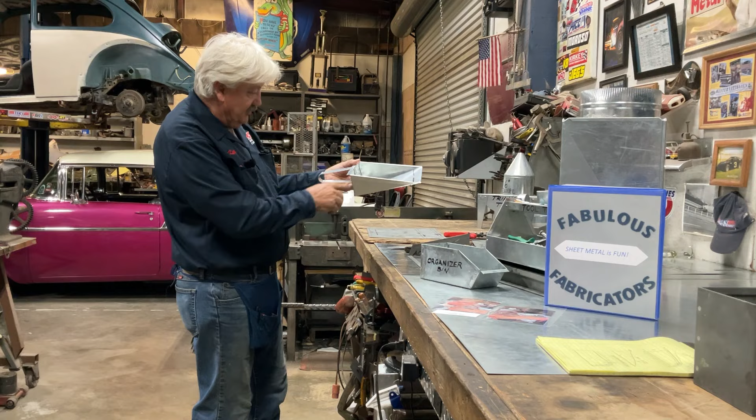Tonight's project is going to be the dustpan. We're going to make a dustpan that is 11 inches by 9 inches by 3 inches deep. We're going to bend the handle up and we're going to rivet the handle to the dustpan. 26 gauge galvanized.

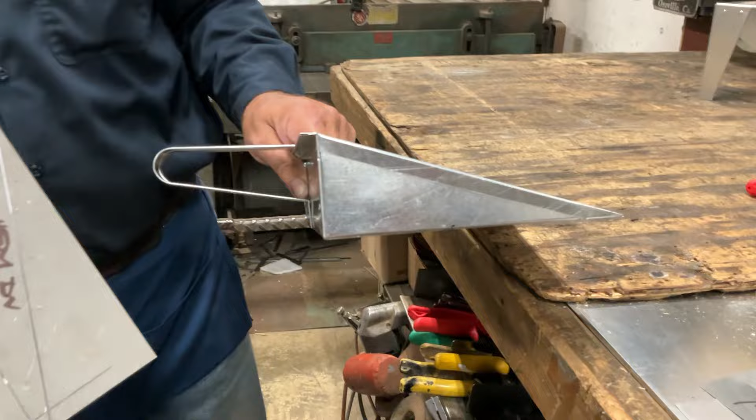So you can see our dustpan is right here. Here's the base, here are the sides, here's the back. We have a 1/2 inch hem and a 1/2 inch 90. That's what we have in the back of our dustpan. All right, so now we've seen what it looks like. And this is the piece of flat stock.

Now, I'm making a dustpan that is 11 inches wide, 9 inches this way, and 3 inches deep. So if you wanted to make a dustpan just like this, which I like it when you guys make them different, you can make it bigger, smaller, shorter, longer, whatever fits your needs. If you want to make one just like this, you're going to start with a piece that's 18 inches by 13.5 inches. And that's going to give you an 11 by 9 dustpan.

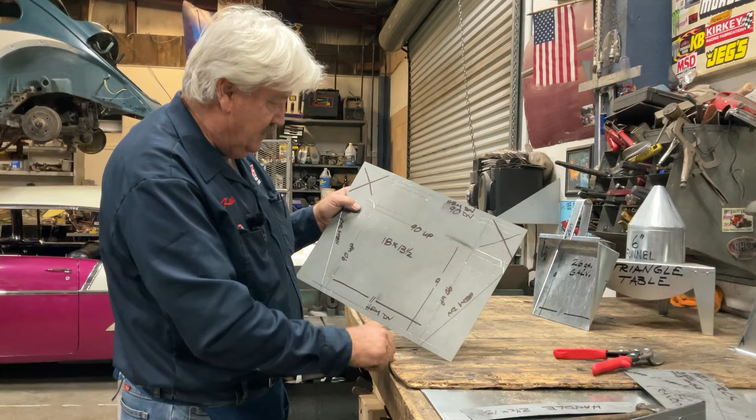So we've cut our piece 18 by 13.5. I've laid out the pattern. And let's go ahead and cut it out. And I'm putting on my reading glasses. And let's cut this out.

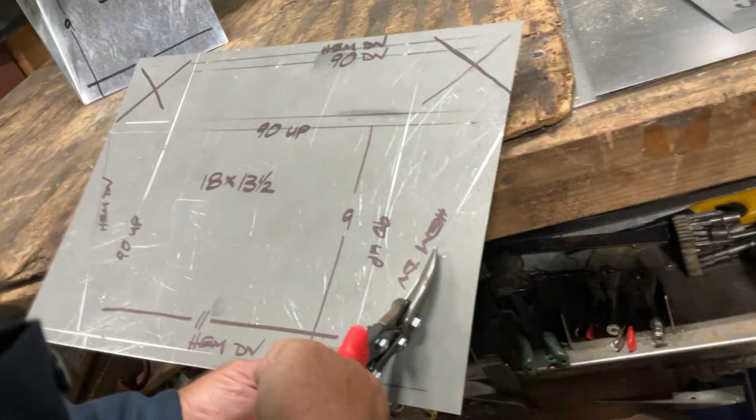Whenever you cut with your snips, you never go to the end. So as I'm squeezing, I'm cutting. And before I get to the end, I stop. And as I'm opening the snips in preparation for the next cut, I'm pushing forward. And that's what keeps you in the line. That's what keeps you cutting straight.

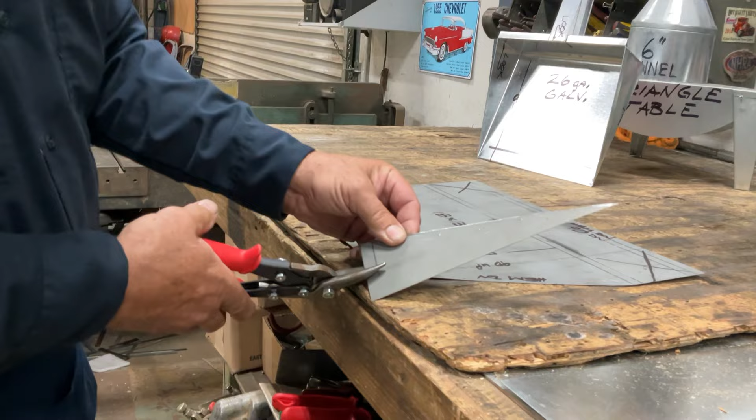If we went to the end, that even bothers me to do that. I hope you can see what it looks like if you do it the wrong way. Don't do that.

I'll come to your house and eat all your chocolate. Plus, my wife says I snore.

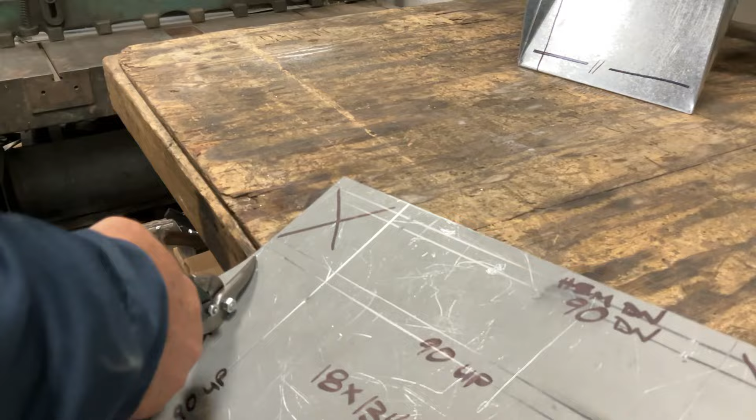All right. We got one side cut out. Let's cut the other one. I like these offset snips, but it's personal preference. Any snip will do. Before I throw these in the trash, I usually try to fold that pointy end around. Now we're going to cut this corner out.

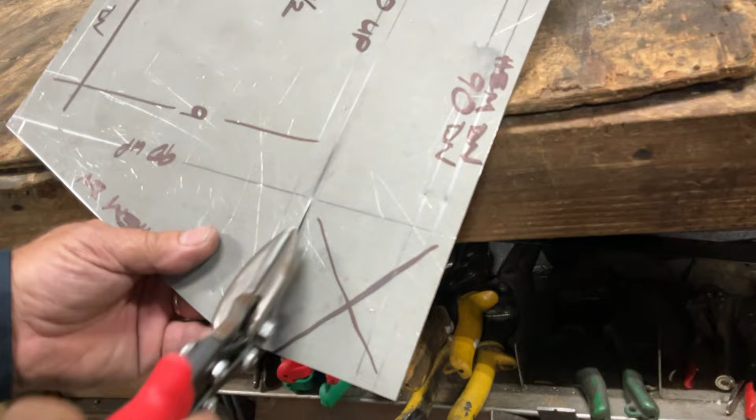Now you see I stopped a little short of the line. This line is going to go all the way. Now, since I stopped short, this part is still attached. So when I cut that little piece off, it stayed attached to there.

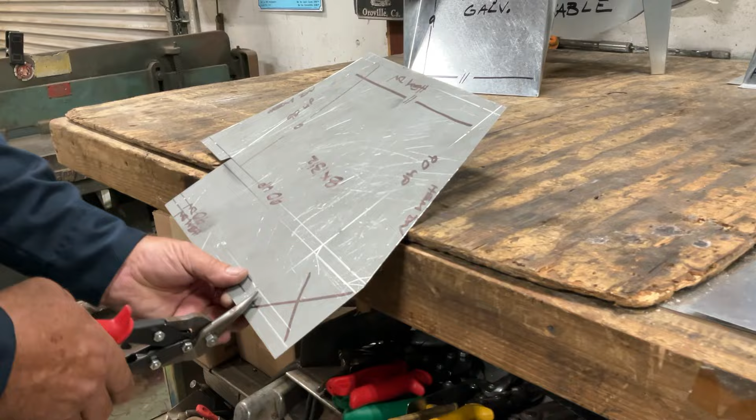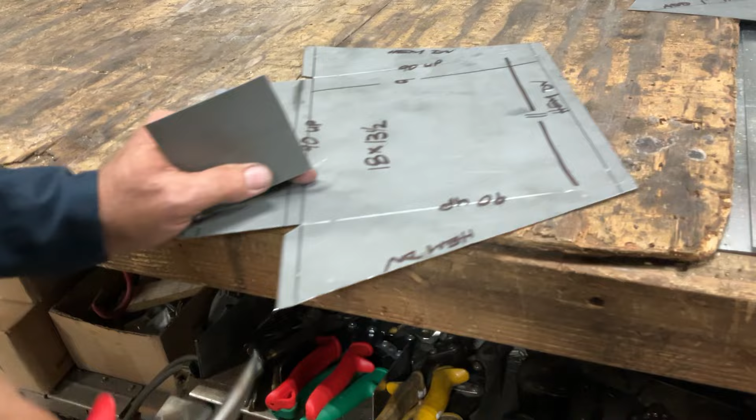So here we go again. This side, you go all the way into the corner. This side, this is our half-inch tab, this is what we're going to put our rivets in. I'm going to stop short and fold that up out of the way. Then that piece stays attached. Not only is it not trying to get us, we don't have to look for it on the floor.

Now we're going to notch these corners out for the hem. Anytime you're notching, always cover the part that's going to fall with the end of your snips.

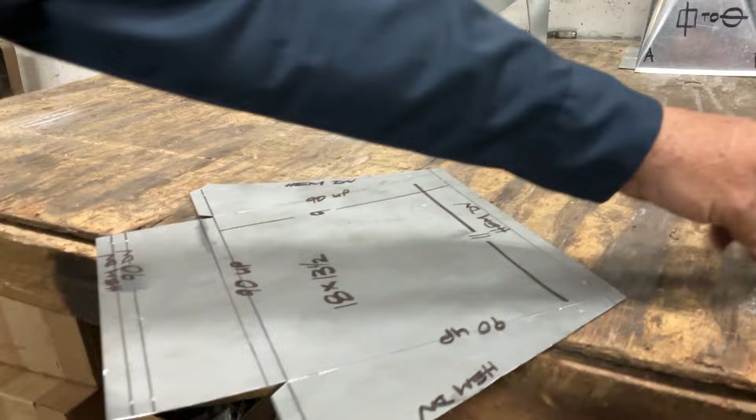That was the right way. Let's do it wrong, just in case there's some visual learners out there that want to see what wrong is like. Okay, so now this time the drop, I can see it in its entirety. See all the drop? Whenever I make this cut, if I can see it, it can come toward my face. So what I'm going to do is just put my thumb over it. If I don't put my thumb over it, sometimes it can launch. That's not good.

We're going to cut these out. All right, let's get that off.

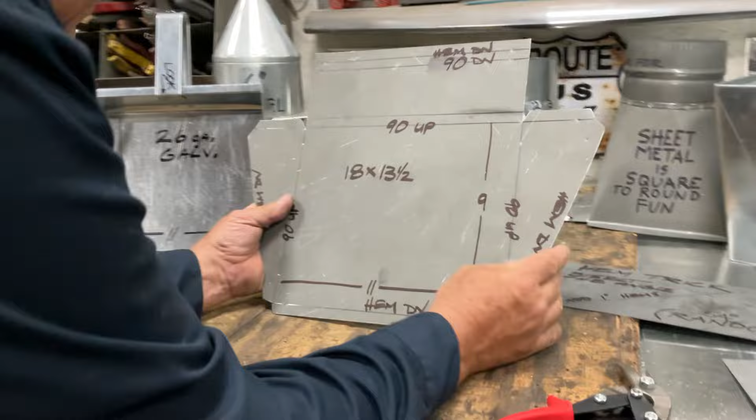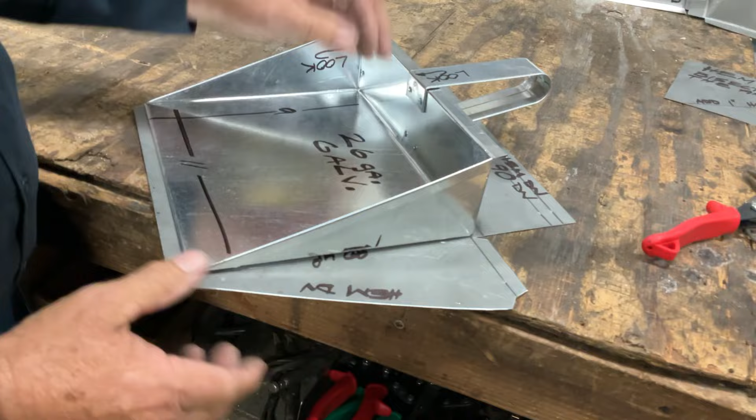So what we have here is our dustpan would fit right here. This is the side that we're going to fold up. This is the back we're going to fold up. The other side, these are the hems.

And while I'm laying out a pattern, that's when you want to put all your markings on there. So if you get this laid out and then you get a phone call, or it's coffee break, or it's Friday afternoon and you come back on Monday, we don't have to reacquaint ourselves with the project. While it was most clearly in our mind as we were laying it out and making it, we went ahead and marked it. So I could come back a month from now, not even reacquaint myself with the project, and just go right back to it and bend it up.

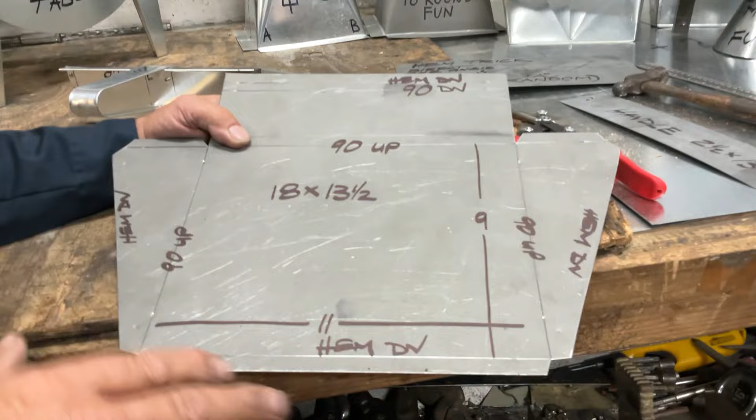So that's a hem down. Anytime we're going to do our bends, we always make the initial bends the ones that affect the project in the least amount, and that would be a hem. You ready to go over the brake and bend it up? All right, all right.

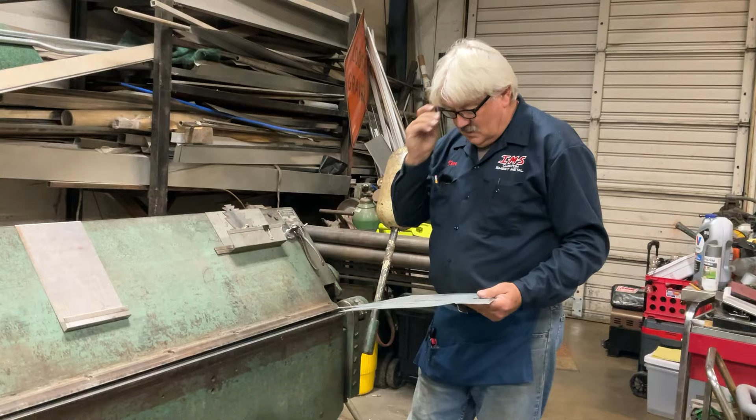Put my glasses back on for the bending. So the sequence of bending, you always perform the function that affects your project in the least amount of a way. So I have a hem down here, let's go ahead and do that.

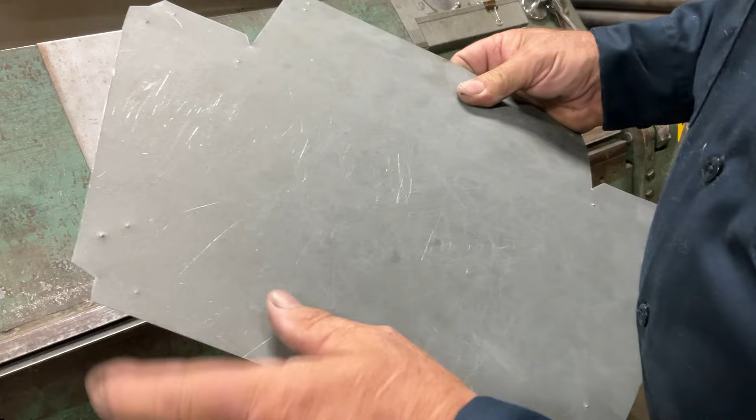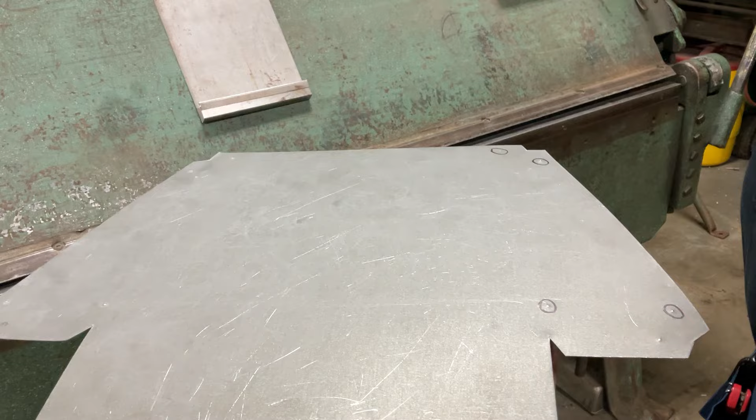So what I've done, I'm hoping you can see this. On these lines, there's a prick mark right there. That's what I'm looking at when I go to my other side. Right there on the line, I put a prick mark on it. And that way when I flip it over, you can see these lines. I'm going to circle a couple of them just so you can see them. Those are the lines that I made from this side, but because that's a down, I'm going to be reading it from this side. So I will be looking at the prick marks and not the scribe lines.

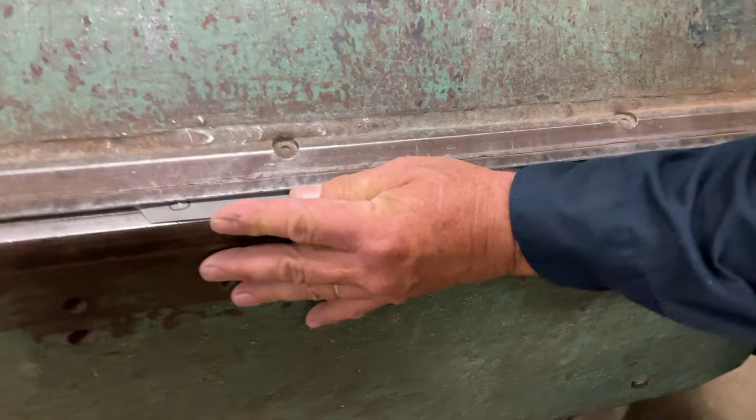All right, so I'm going to line those prick marks up, clamping it down. That's the initial bend. The front of the brake here is 135 degrees, so I bent that over to 135. Now, 180.

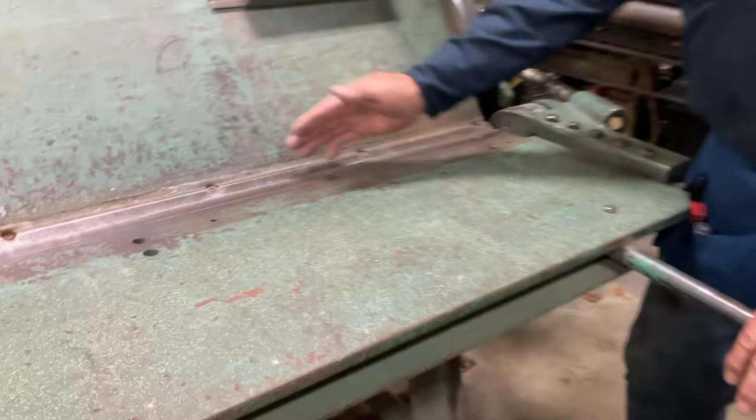Let's do the same thing again, lining up the prick marks. Using the prick marks because we did our drawing on the other side and transferred those lines through with a prick mark. There's 135. If this is flat like a table, that would be a 90-degree bend. That's a 90 and an additional 45, that's how we get the 135.

Now, a hem. 180. Look at that, so I've hemmed over these two edges. Now let's go to the front.

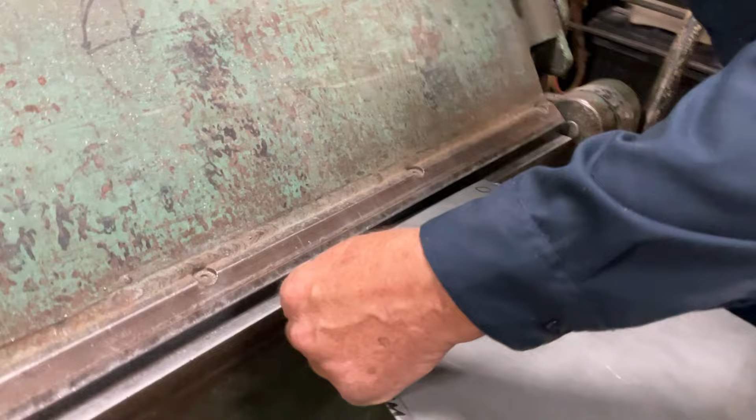And if you are not a highly skilled, highly paid professional of sheet metal talent, then you can go to, there's a couple of our videos. One is how to make a tool tray. And a couple videos ago, we did one where we actually showed you how to make some fabrication and bending tools. So go a couple of them back. What was that one called? Folding and forming, yeah. And then you'll be able to do everything that I'm doing, without this giant machine in your living room. This machine is 10 foot long. All right, so we've got those three.

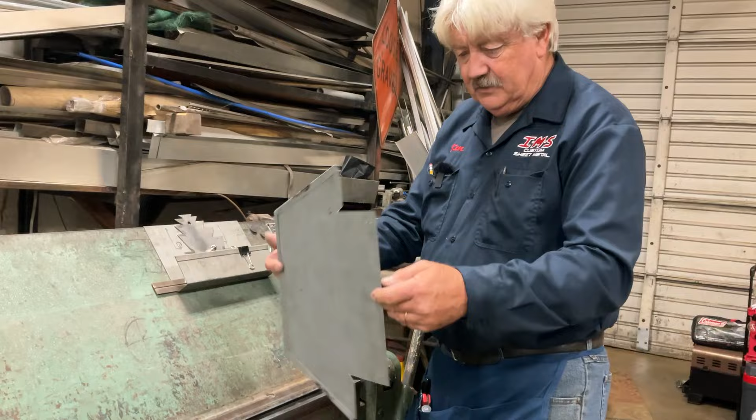Glasses back on, back to the hem. So now we're on the back side of the dustpan. There's 135.

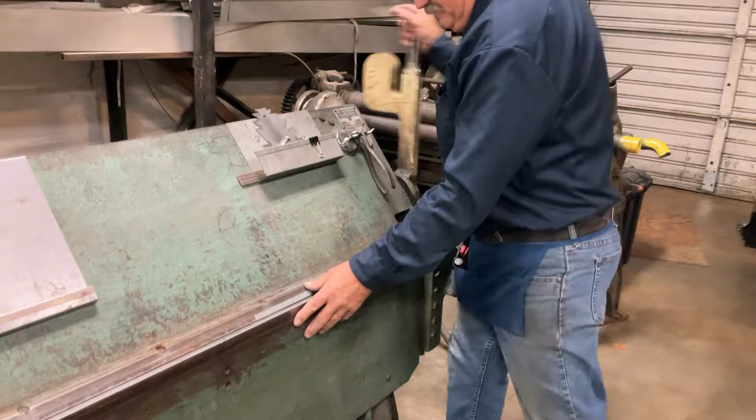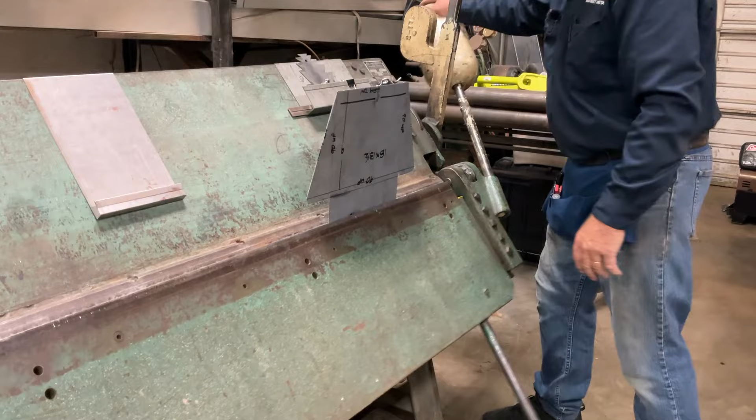Flattened out, 180. Now I'm going to clamp it right on that bend line. This one, we're going to go a 90. When the front of the brake, the bending leaf, is flat like a table, that means we've made a 90-degree bend.

Let's just take a quick look. I folded this hem, the one across the front, the one across the other side, and we've done the bends on the back. Now we're going to bend this one as a 90-degree up.

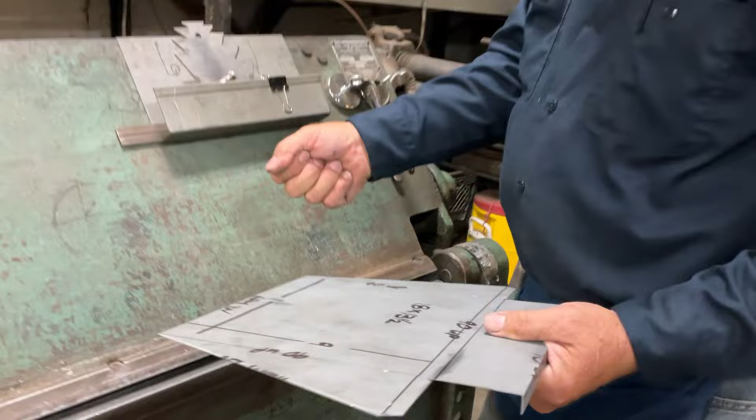So whenever we put this in the brake, we don't have to squeeze the handle all the way till it stops. I just want to make sure we have a grip on the piece, because with these hems on here, if we clamp this all the way down, it flattens out a portion of this, and then we can't impress our friends and neighbors. And that's why we get up every morning, because we have friends and neighbors.

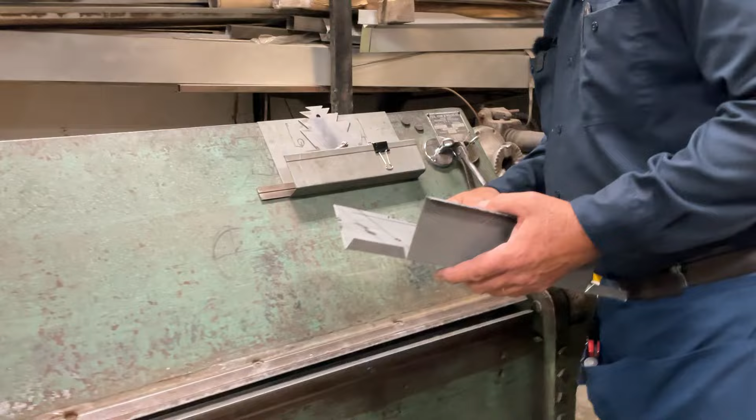All right, I'm going to show you that part so you can see what we've got so far. Okay, I'm just going to give this a little push right here and a little push, because I want this flange to come up on the back side of the back.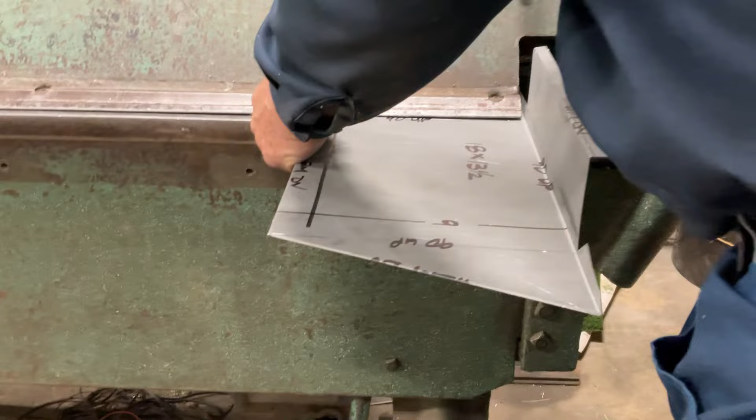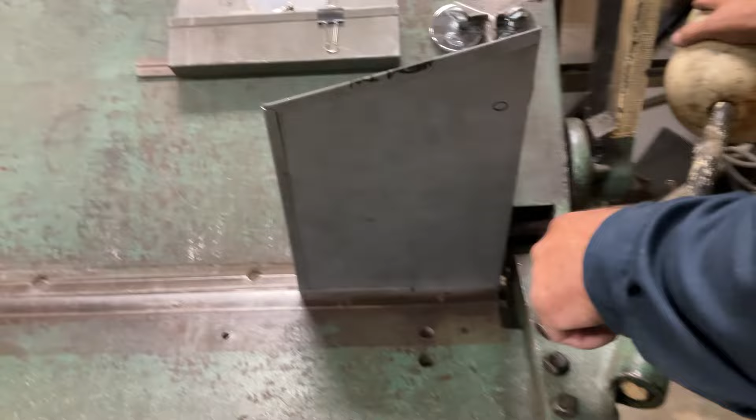Okay, you ready? Look at that. I'm just making sure that whenever that goes to the back side, and I'll explain that to you when we get back over to the bench.

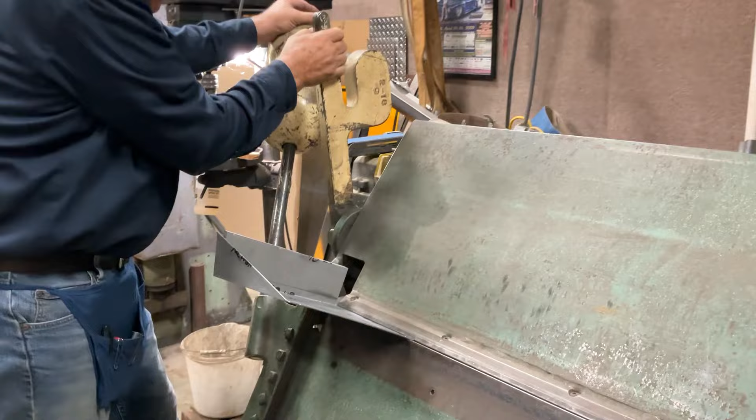Now, to make our last bend, we have to go to the other end of the brake. We're going to do the same thing over there. That was my end of the brake. This is Stacy's end of the brake. But she's operating the camera tonight, so I'm going to do her end.

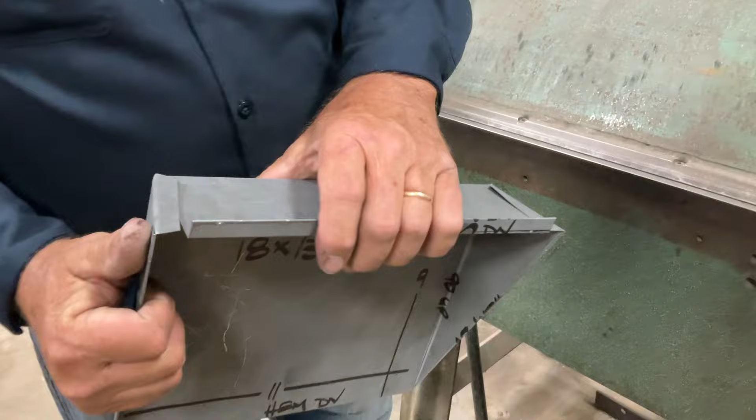We're going to bring that up right there till it stops. Might as well go ahead and close it. So what we've just done is we've just bent these sides up. All right, let's go back over to the bench and finish the...

Are you still rolling? Yeah. Okay. Well, this is, we're not going to feature a lot of the work we're doing on the Volkswagen, but we're going to make a Baja out of it.

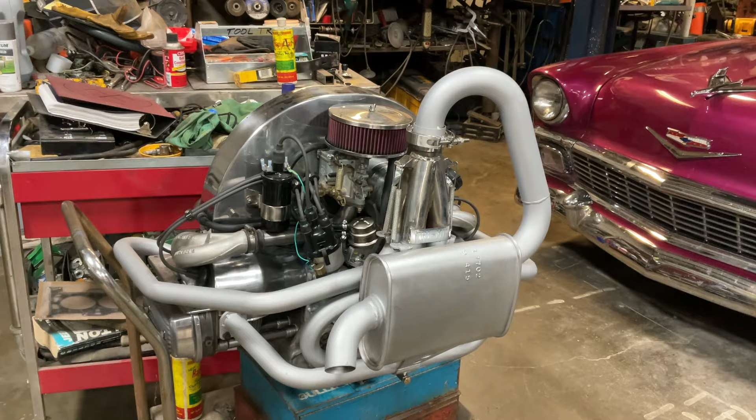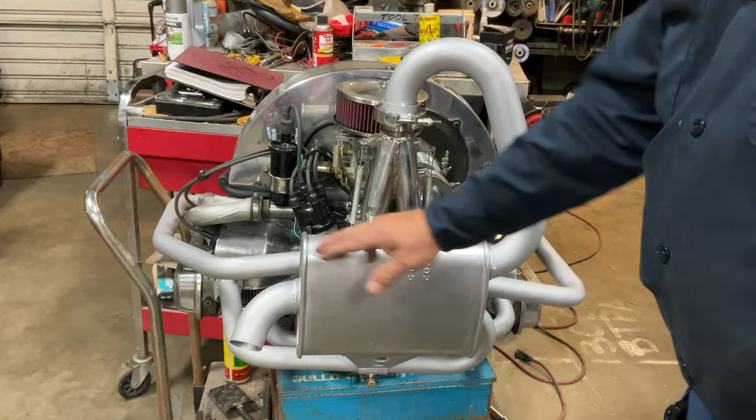So we've done a bunch of metal work, and I went through the engine, the crank and rods were good, but new bearings, cam, pistons, rings, all new all the way throughout, and it's ready to rock and roll. I bought a couple of J-bends on the internet and a flat muffler, and I was able to weld this into it, because this had a stinger on it. This engine is out of a dune buggy.

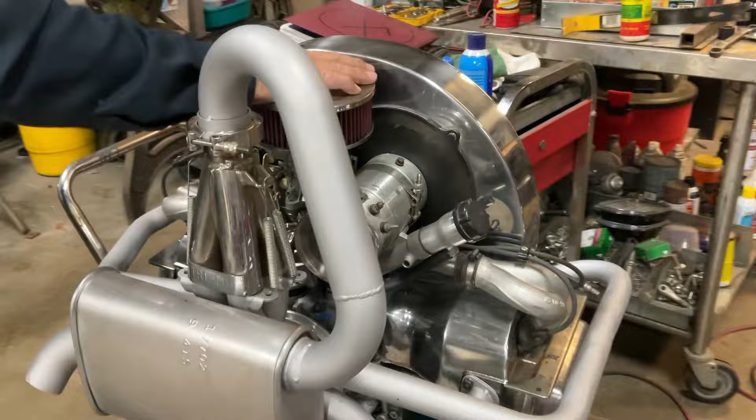So we won't go too deep into this, but those of you that know what an air-cooled Volkswagen is, that's what that is. All right, so what we have here is the handle, and the handle is 2.5 by 13. I'm going to bend an inch on either side, but since we're right here,

We are going to bend a hem. Then we're going to bend another hem. We're making the handle right now.

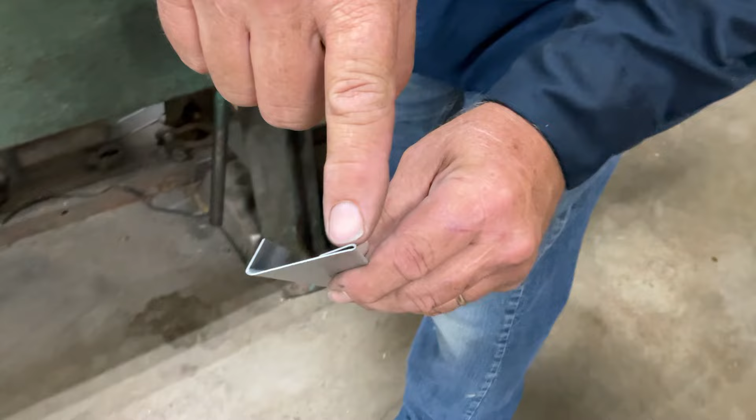So I've already finished one hem. If you can see it, it's shaped like a teardrop. That's what you want. You don't want to flatten it out all the way. You need that teardrop. That's what gives you the rigidity down the hem line. That teardrop right there, can you see that? If you flatten this totally flat all the way, then this loses its rigidity down through the handle.

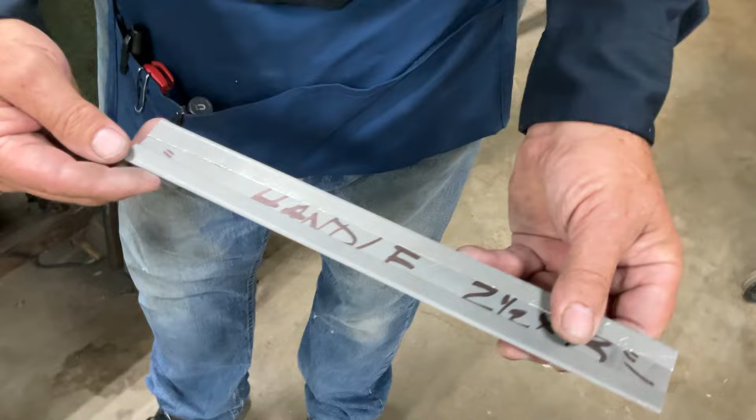All right, we're already here, and I know I'm going to bend a 1-inch flange. This was on Grab Bag of Tools, I think. That's our Christmas tree scribe. So I just made a mark at 1 inch right here. Let's bend that up an inch.

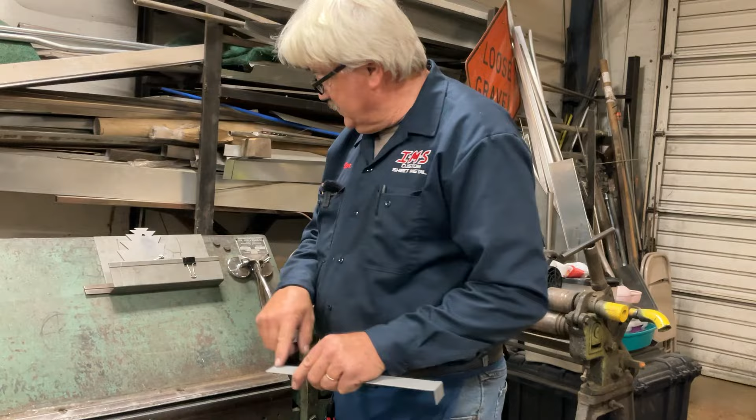And there's an inch on this side. So this is quarter, half, 3/4, and then 1 inch. There's a scribe at 1 inch. If you want to learn how to make this, it's on the grab bag of tools lesson. So we're going to bend this at 1 inch.

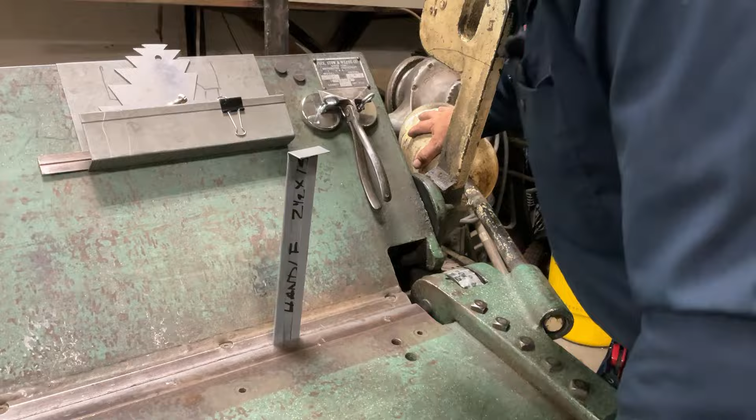Okay, all right, let's go back to the bench. When I nod my head, you hit it.

So we just folded the hem on our handle, hem on both sides, 1 inch on this end, 1 inch on that end. You can see what we have here. We have our hemmed handle. Here's the 1 inch, here's 1 inch.

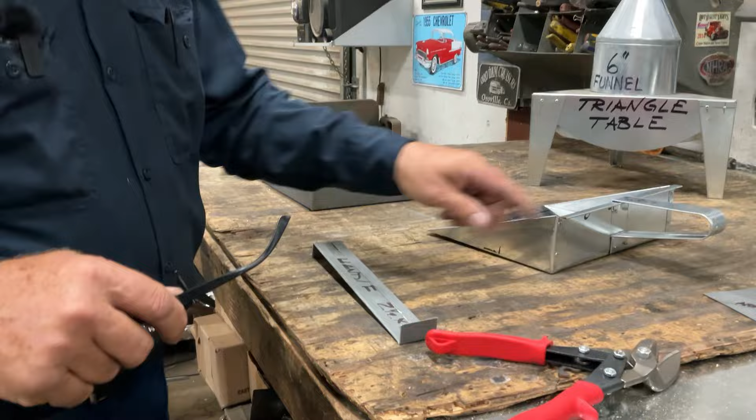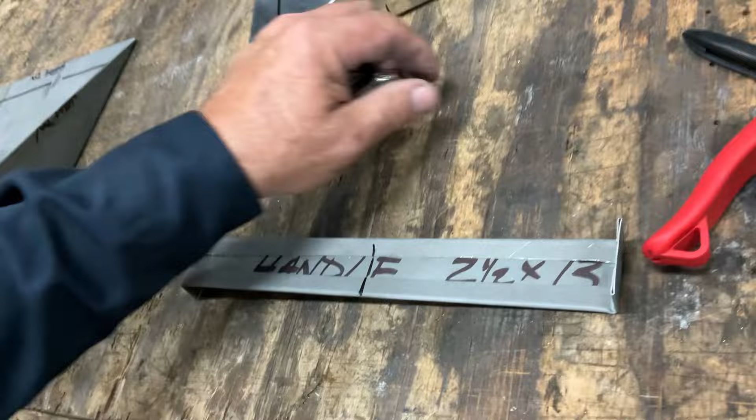Now what we're going to do is bend this. What we have here is all kind of high tech. I'm going to make a mark at 5.5 inches. That's halfway, 5.5 is half of 11. Now this is the high tech part. So at your house you might have a piece of pipe or a broom handle, but here we have this really nice tool, it's called a box and pan brake. It's probably $6,000 or $7,000. So what we're going to do is use this to bend our handle.

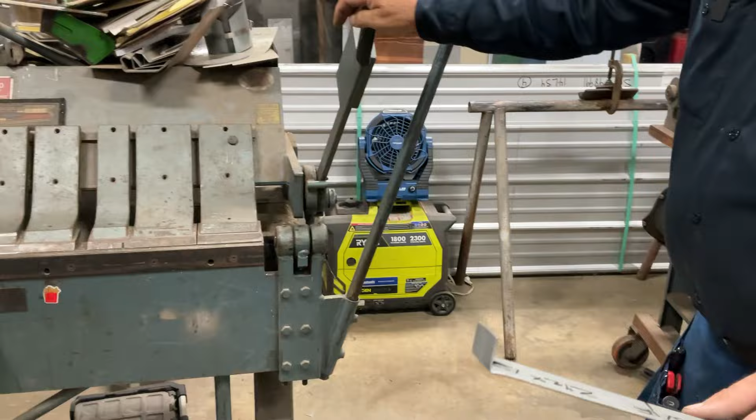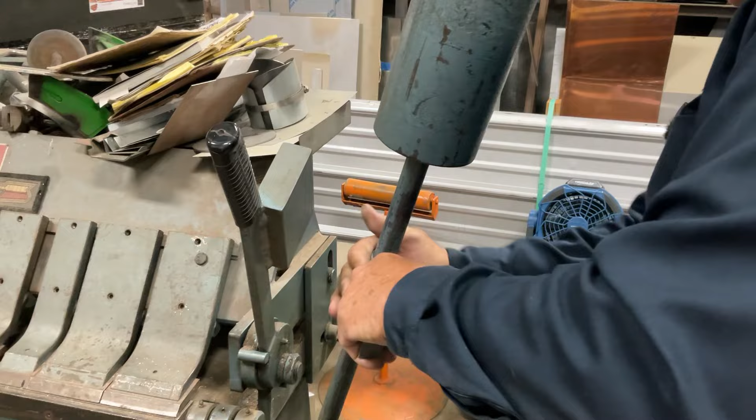Here's our mark right here. Here we go. Man, that's why that machine's worth so much. Look what awesome work it does. All right, so...

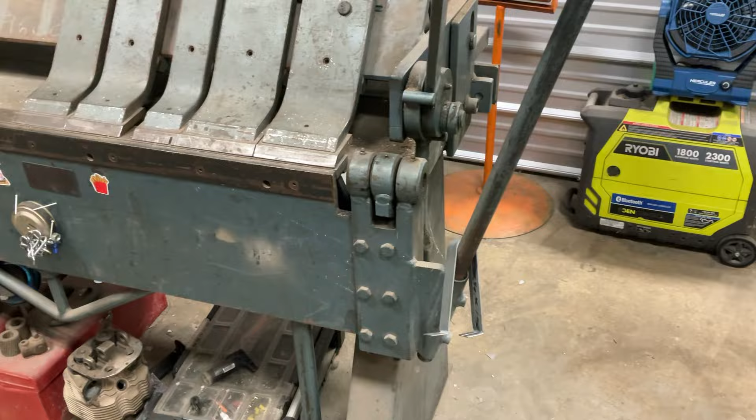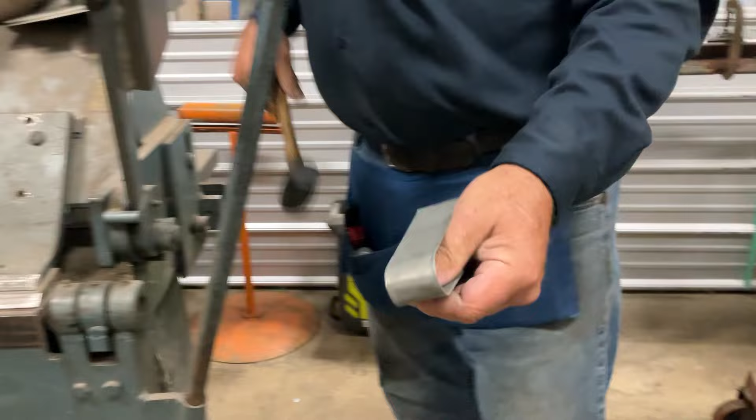You'll notice that the bend is irregular. But did you see there was no panic look on my face? The reason there's no panic, can you see this right here? I'm going to get this around here. Look at that. So if you had a $7,000 machine like I do, you can have results just like that. Wow, that thing's worth every penny. Wait, a little bit more right here.

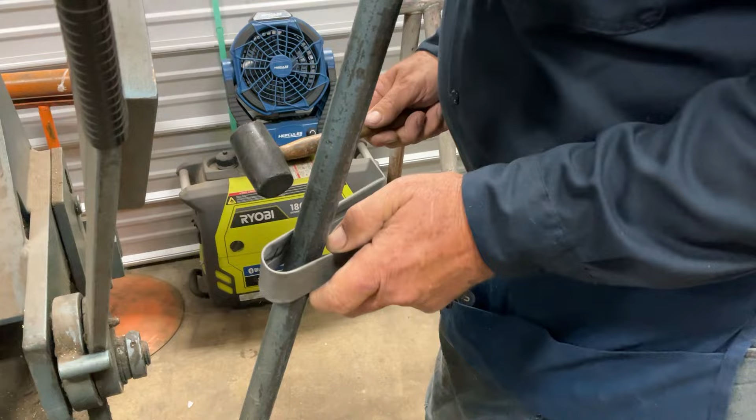Or you could use a broom handle. But just in case somebody comes in, we don't want them to catch us using a broom handle, because like I said earlier, I'm a highly skilled, highly paid professional.

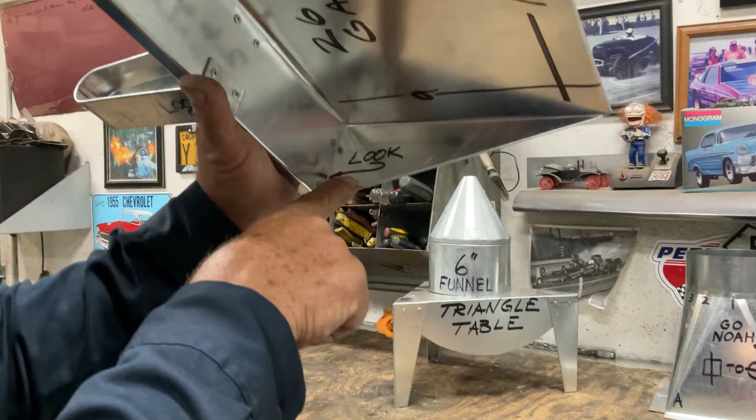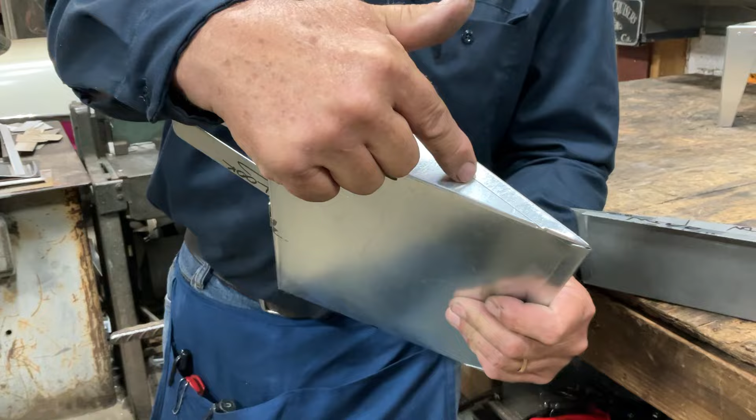All right, so we are ready to... this tab comes around the backside of the dustpan. On the dustpan that I made, see, look what it says. What I want to point out is the hem, the tab is on the end piece, and it comes around behind the back. So that means if you're holding here and pushing down here, the tab is locking this corner together.

If we would have put the tab on the back side, then when you pushed here, you'd be putting stress on the rivets. But that's the reason the tab is placed where it is, that's the reason it comes behind. Because this way we get the strength of the tab, and really the only thing the rivet is there for is to keep the dustpan from disassembling itself. So that's critical, that's the reason the tab comes around the back instead of being on the back and bent around. All right.

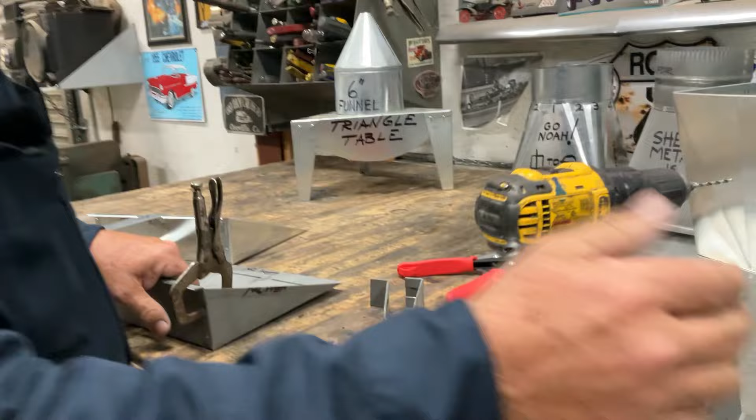Let's put 2 rivets in here. We're gonna... we always want to push as hard as we can reasonably push and use the fewest amount of RPMs that gets the job done.

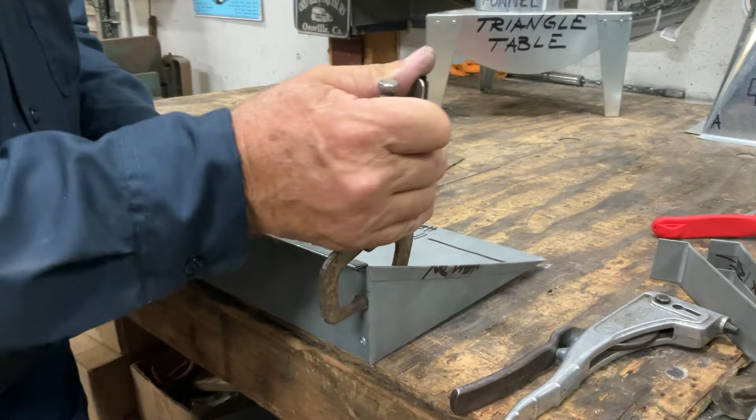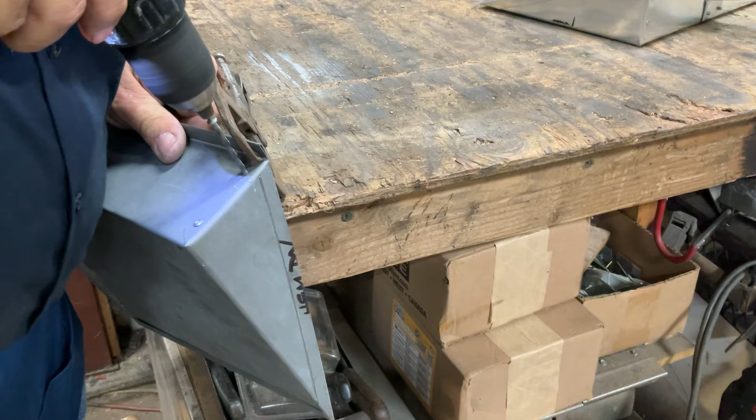Let's put a rivet in here. I'm going to get this up as far as I can. Put one more rivet in it. I keep this old junk piece of plywood on my bench so I'm not continuously drilling holes in my workbench. Always make sure you put your body in a safe place when drilling holes.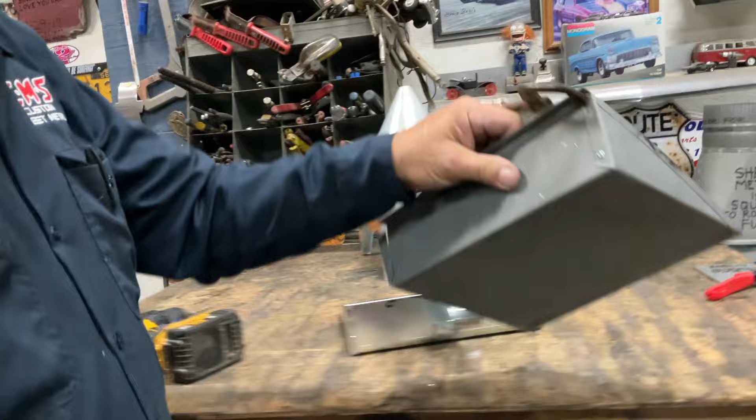Almost every tool we have in the shop wouldn't think twice about giving you a bruise or a cut. We don't want to do that.

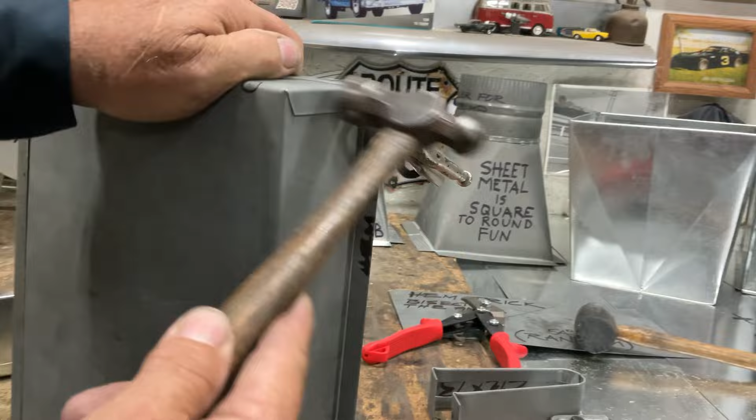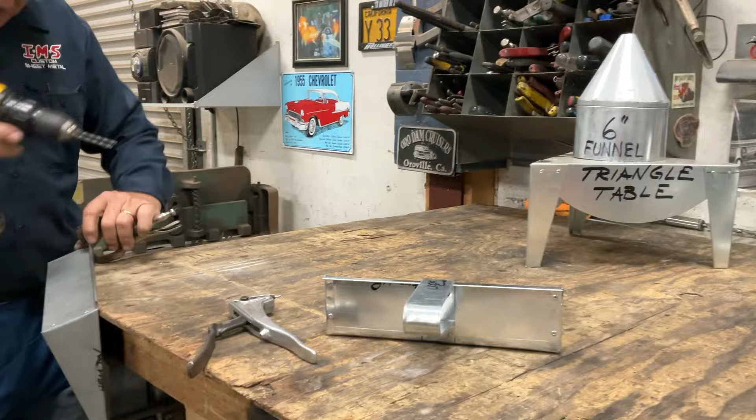I'm going to tap this around a little bit. Let's go back to the corner, because if I'm going to drill a hole in something, it's going to be a piece of plywood that I don't mind throwing away at the end of the day if I have to.

Preloaded the pop rivet gun, that's a good trick. I'm going to get this vice grip up as far and away as I can. Let's get our second rivet in here.

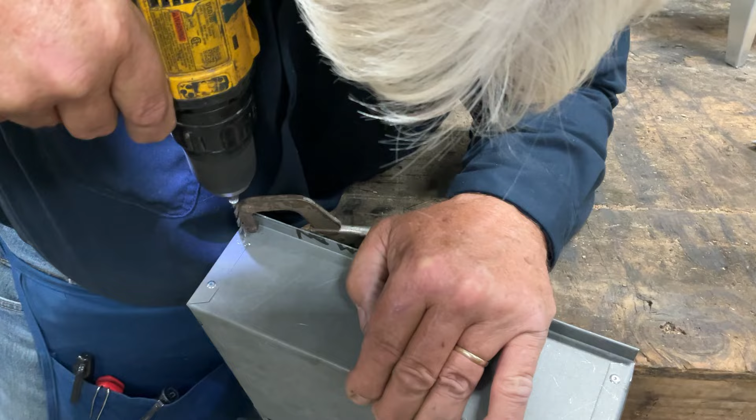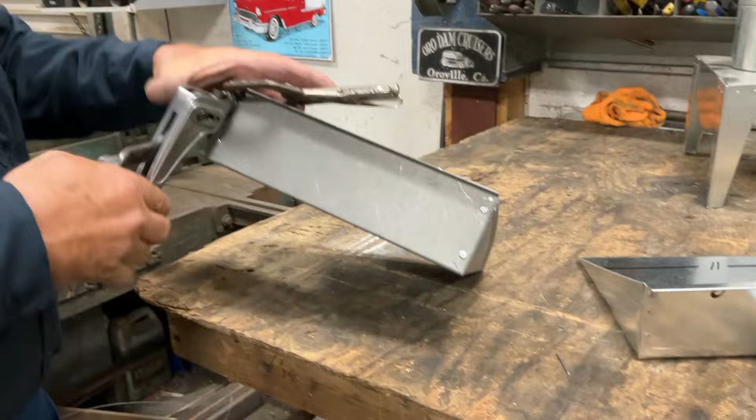Well, I like the way this is looking. I know we're going to need more rivets, so we're going to go ahead and load this. That way, whenever we get ready to put the handle on, the rivet's going to be ready.

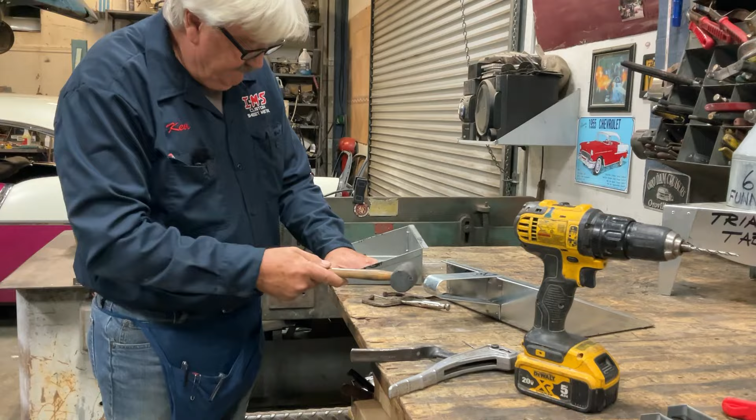I'm just tapping this side around. You can see the bow in it. The reason it's bowed is because I didn't clamp it super hard in the brake over there, because that was going to smash all of my hems. So I'm just going to tap this around.

I think I got this at the Dollar Tree 20 years ago. All right, now to the handle.

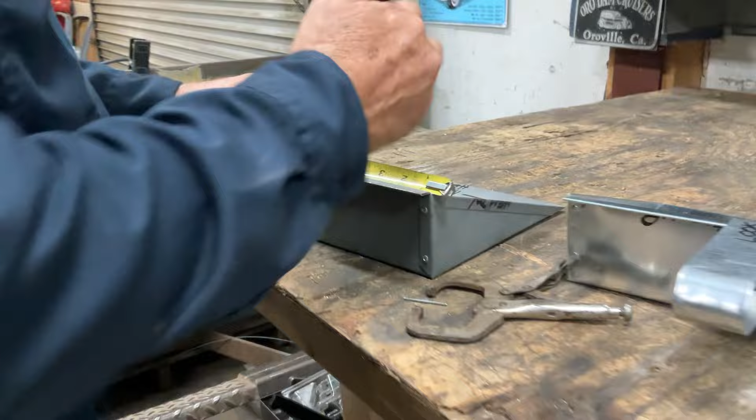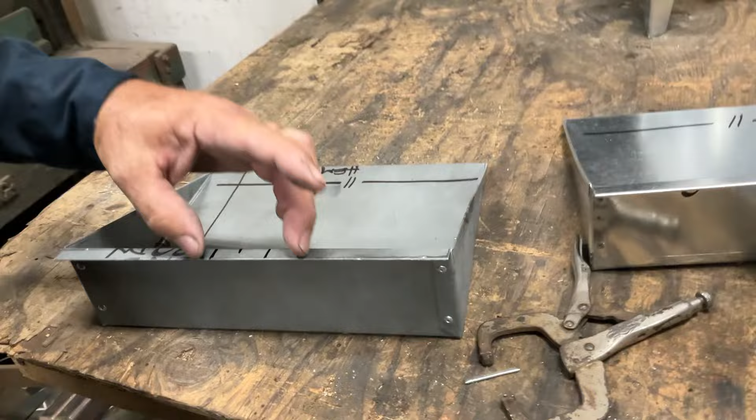Our dustpan is 11 inches wide, half of that is 5.5. So I'm just going to make a mark at 5.5, but our handle is 1.5 inches wide. So I like to mark the center line, and then go 3/4 on either side. I like to mark both sides, and then it makes it more difficult to do it wrong. If I only marked one side, there's a chance I could look at that and put it in the wrong place. That's the center line, there's a center line and 3/4.

And look, if I just move this over a little bit, I can double check myself, and now I know I'm in the middle of the dustpan. So what we're doing with our handle is I brought the top of the handle inside the dustpan, because let's look at that.

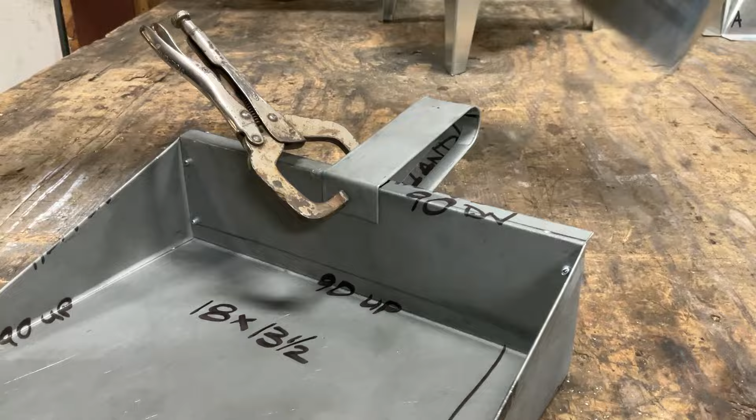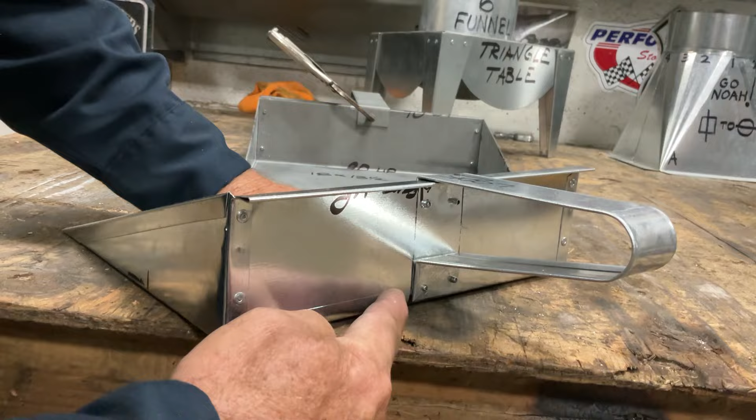If I have weight in the dustpan and I'm pushing down on the handle, I want the handle over here. Just like we did with the back, if my handle comes to the inside on the top, then I'm actually pulling against this flange, against this bend right here. I'm not just pulling against the rivets. Conversely, the bottom of the handle is outside the pan. That keeps the pan clean on the inside and the bottom. And also, when I push down on the handle, I'm pushing into the pan.

So this makes everything last longer. Right whenever I push down here, the load is being carried by the bend and not the rivets. If this was outside here and I put the rivets in, then all the load is being borne by the strength of the rivet. If I push the handle down, the only thing I'm trying to do is pull my rivets out. But if we push this over the top, you could almost use it without the rivets. And the fact that you can almost use it without the rivets tells you that you're putting it together correctly. So let's get back to this. Let's put a clamp on there.

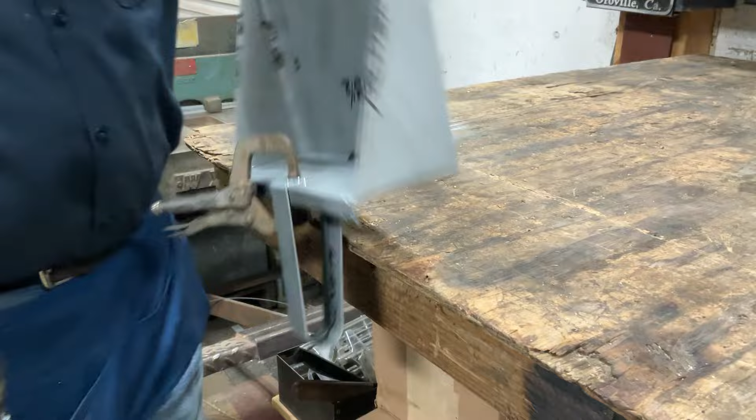Always put yourself in the safest place you possibly can. So you'll notice that I'm drilling a hole. This hem goes over and comes back for half inch. So I want to get this rivet somewhere in the middle of that hem. And this way I get all three pieces. So I got both parts, double thickness of the hem, and I got the back.

Oh, this is looking good. I can't wait to happen upon a mess, because we got the cure.

That's how my dad drilled. He always stuck his tongue out. So that's how I do it whenever I remember to do it that right. Stick my tongue out.

All right. Oh, we are getting so close on this. This is exciting.

All right, so on the back, we're doing so good. Let's go ahead and measure this. 11, half of that, 5 and a half, three-quarter off to each side. Now I know that's where the middle of my handle is going to be.

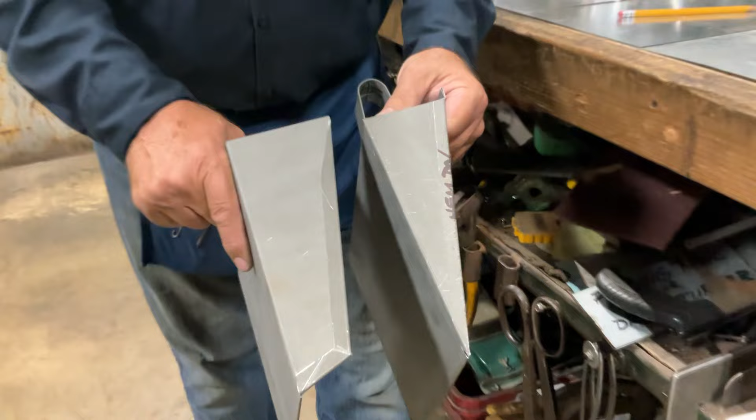This is, can you see the word alternate right here? I wanted to make our dustpan very approachable, very easy to picture when it was flat. But you could also do the side like this. You could make your side come up and back this way, and you'd have more room if you had like sawdust, more room for more bulk if you raise the entry up. So instead of coming down to a point, I came down to a certain point and then dove down to the corner.

I think that's going to do it. I want you guys to show me your work. Show me what you can do to improve this simple, unassuming, useful dustpan. Show me what you can do to make this thing awesome, maybe amazing. I don't know. So if you make something better, or if you make one just like this...